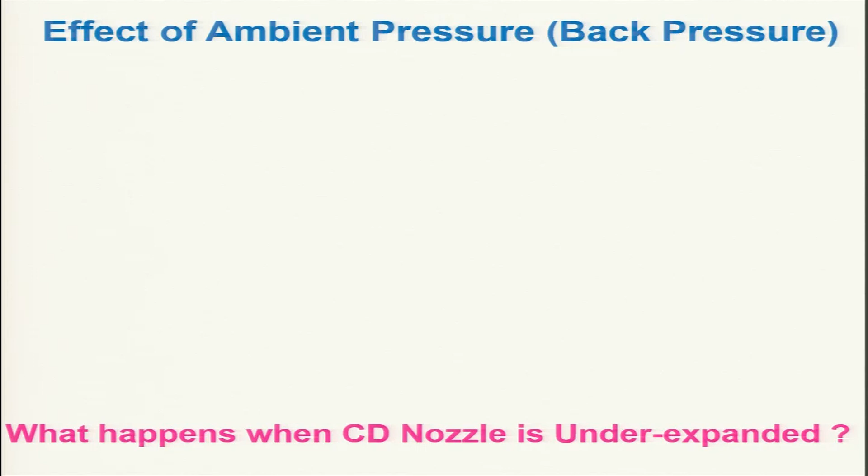And today we will be discussing the various features downstream of the nozzle when it is over expanded and when it is under expanded. So, let us consider the effect of ambient pressure or back pressure on this nozzle, and let us see what happens when the convergent-divergent nozzle is under expanded. So, let us look at what is happening.

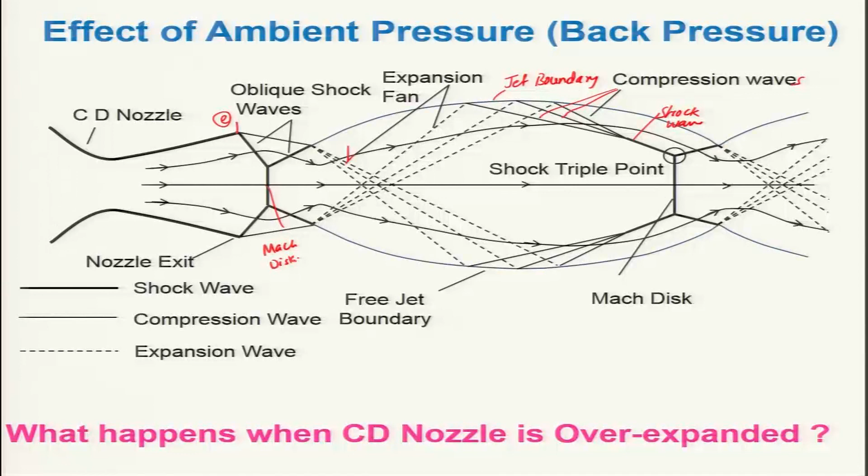expanded nozzle. So, one has to design in such a way that the over expanded portion of the operation during its flight must be reduced, rather one will go for little or more over expansion such that the losses will be minimized, and that is what is being done.

Now, let us look at what happens, because all this discussion we have done is considering that there is no boundary layer. However, there will be a boundary layer. It may be a very thin one, because the flow is accelerating, and this is your boundary layer. And when the shock is interacting with this boundary layer, the pressure will be higher downstream of the shock. So there will be an adverse pressure gradient, and the boundary layer is more likely to be separated out, such that there will be recirculation.

And of course, in this condition the pressure will be such that it may have a higher thrust. However, this boundary layer separation may be asymmetric in nature, so that it will give you side thrust. So, this flow separation will be dependent on several parameters. What are those things, let us look at it.

So, flow separation depends basically on the angle of divergence, and also the wall pressure, and it will be dependent on the local Mach number, and local pressure gradient, and wall roughness also plays an important role for initiation of boundary layer separation, particularly because wall roughness affects the turbulence level. If the turbulence level is higher, then naturally the flow is less likely to separate, and it will bear the higher adverse pressure gradient. So, for that, of course,

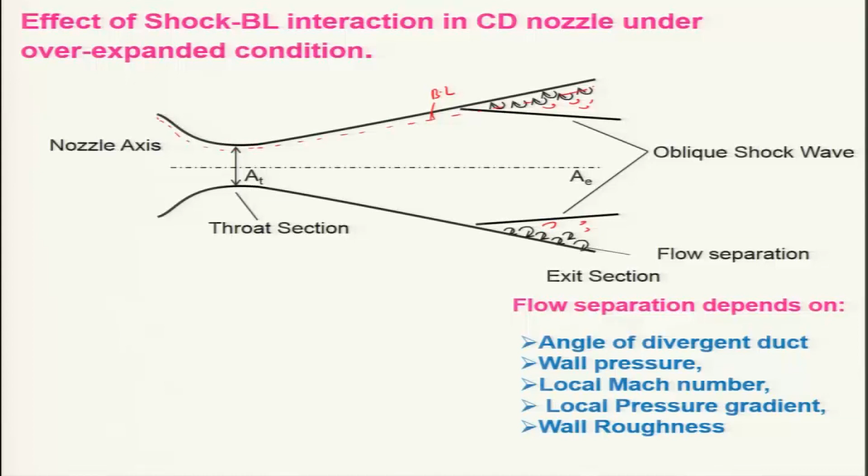while designing, a certain thumb rule is used, which is known as the Summerfield criterion for flow separation. That means PE by PA generally will be less than or equal to 0.4 to avoid flow separation, when PTE by PA, where PTE is basically PT2 at the reservoir, is greater than 16, for alpha, your nozzle angle, less than or equal to 30 degrees. If you look at this angle, this is alpha, less than or equal to 30 degrees.

But this is a thumb rule, and it is also dependent on the local Mach number of the flow. So, people have conducted experiments and arrived at a semi-empirical criterion for flow separation, that is PE by PA is equal to 1.88 ME minus 1 to the power minus 0.64. That means if the Mach number is greater than 1, naturally this will be positive, so the exit pressure will be less than PA,

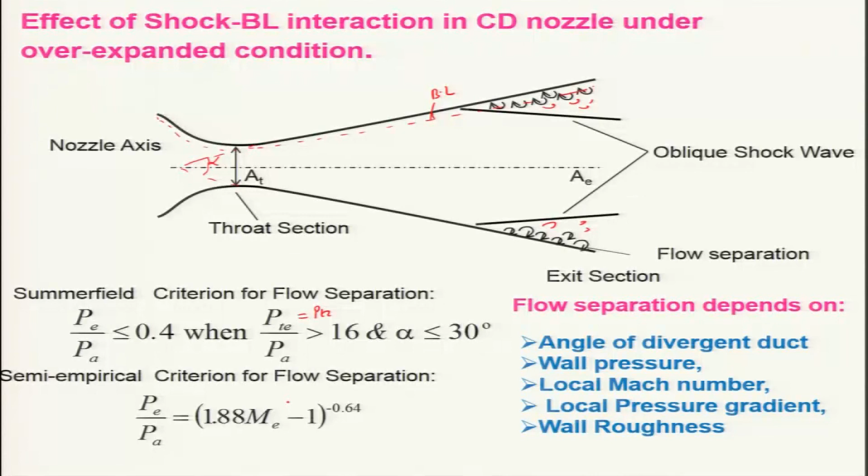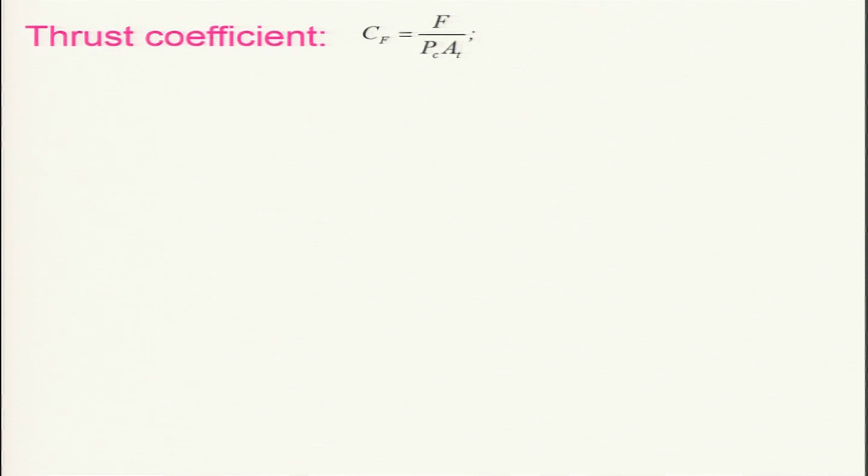So, let us now look at the thrust coefficient, which we had defined earlier. We know the thrust coefficient Cf is equal to the thrust divided by chamber pressure Pc and At, your throat area, corresponding to the choked condition. So, let us recall the thrust equation for a rocket engine that we derived earlier, that is the thrust F is equal to m dot P VE plus PE minus PA into the exit area of the nozzle.

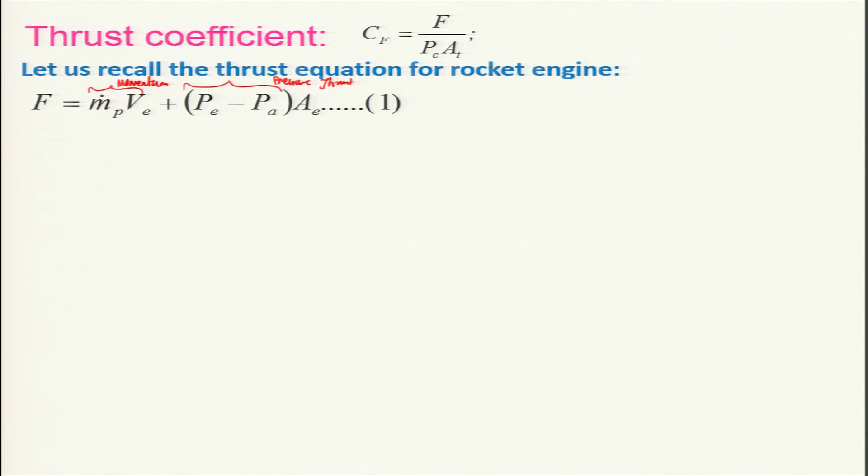So, this is basically momentum thrust, and this portion is your pressure thrust, which we have already discussed, and keep in mind that there is no inlet drag in this, or the ram effect is not there, because this is a non-air breathing engine. And in the rocket engine, except during starting and shutting down, the nozzle is choked most of the time.

The expression for the choked mass flow can be derived and written as m dot P is equal to PT2, your chamber pressure, times A star, your throat area at choked condition. Keep in mind that under this condition the throat will attain Mach number 1, sonic velocity, and this is aerodynamically choked, times root gamma divided by root R TT2, where TT2 is your chamber temperature, R is your specific gas constant, into 2 by gamma plus 1 to the power gamma plus 1 divided by 2 gamma minus 1.

This you can derive very easily, as we have already discussed isentropic flow through a variable area duct. And we have already derived the exit velocity expression in terms of the temperature, that is root of 2 gamma RU, your universal gas constant, times TT2, your chamber temperature, divided by gamma minus 1 times m bar, the molecular weight of the gas, into 1 minus P by PT2 to the power gamma minus 1 divided by gamma. We have already derived this expression.

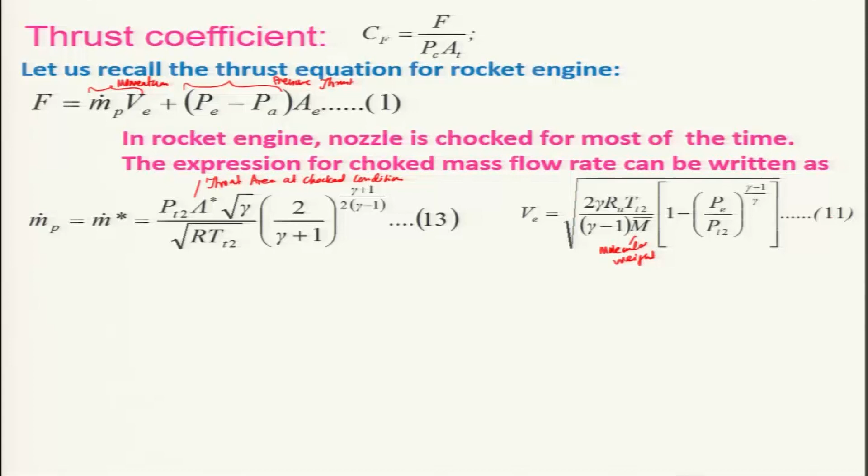What we will be doing, we will be basically using equation 11 and equation 13 in the expression of equation 1, and then we will get basically an expression for the thrust. You can see that it is a very big expression, and we can simplify a little bit and recognize that this is basically Ru, the universal gas constant, by the molecular weight, and this you can basically cancel out. This portion will be cancelled out, right, and you can take this term into this root over,

and I can write down that F is equal to PT2 A star, root over of gamma, 2 by gamma plus 1, gamma plus 1 by gamma minus 1, and this will be 2 gamma square by gamma minus 1, into 1 minus Pe by PT2 to the power gamma minus 1 by gamma, plus Pe minus Pa, and this is the expression you can get over here.

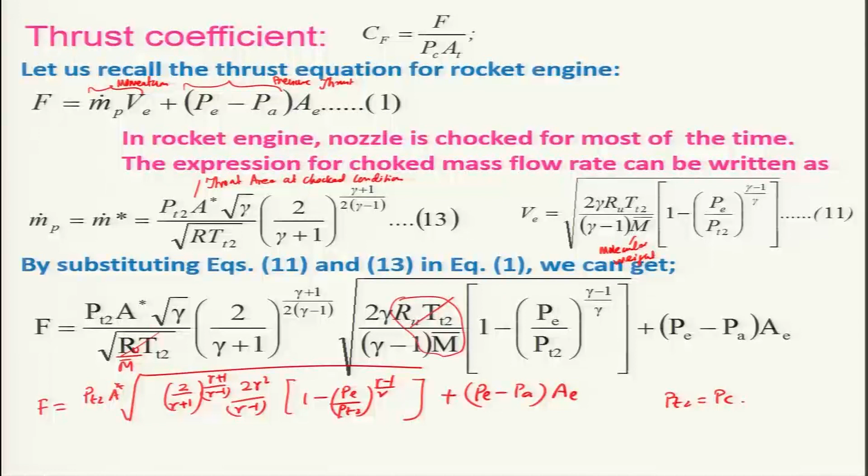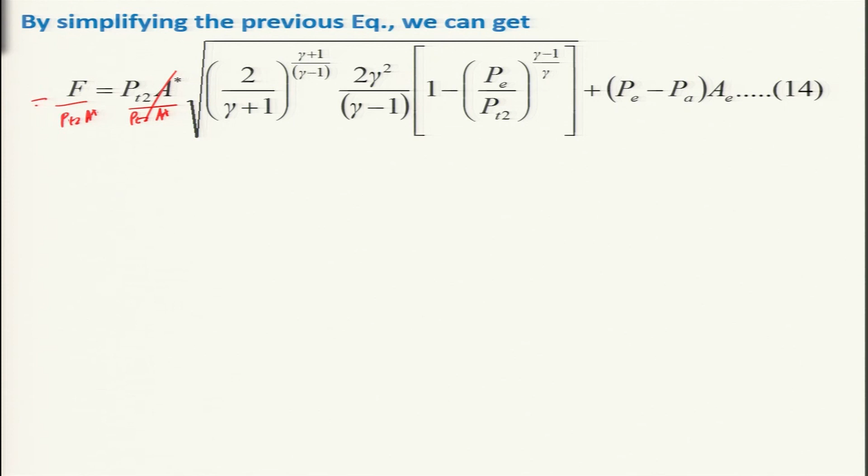And we are going to find out an expression for the thrust coefficient Cf. Therefore, Cf becomes basically F divided by PC A star, and keep in mind that PT2 is equal to PC, the chamber pressure. By doing that we can simplify this expression we have already written over here. So, if I divide this by PT2 A star, cancel it, this is nothing but your Cf. And when we are doing that, we will also have to do this here, that is PT2 A star.

So, that becomes Cf, which is F divided by PT2 A star, and this expression you already know, it is the same as that, and this became Pe by PT2 minus Pa by PT2 times Ae by A star, and this is also known as epsilon, the expansion ratio Ae by A star. Ae is the exit area of the CD nozzle, and A star is the throat area. And you can see from here that Cf is basically a function of gamma, the pressure ratio Pe by PT2, Pa by PT2, and also Ae by A star.

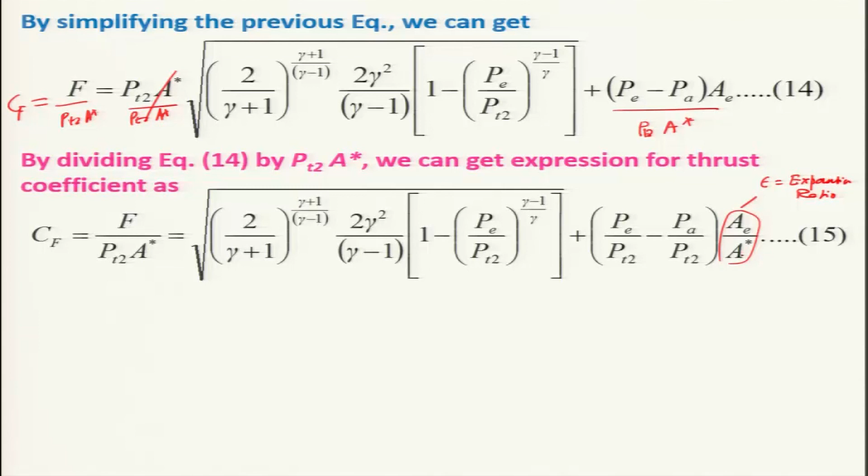This expression indicates basically the amplification of the thrust due to expansion in a CD nozzle as compared to the thrust if PT2 acts on the throat area alone. For example, if I consider this is a CD nozzle, and this is the chamber pressure PT2, and this is your throat area A star under choked conditions. This is the velocity which will be coming over here, such that PT2 is acting on this area A star, and that will be giving a thrust.

Due to this divergent duct, the thrust will be increasing, and that gives the amplification, how far it will go beyond the thrust if the pressure PT2 had acted over the throat area or the choked area. So, this is the indicator of amplification of thrust. As I told earlier, Cf is a function of Pe by PT2, the pressure ratio across the nozzle, and it also depends on the atmospheric pressure with respect to the chamber pressure, Ae by A star, the expansion ratio, and gamma.

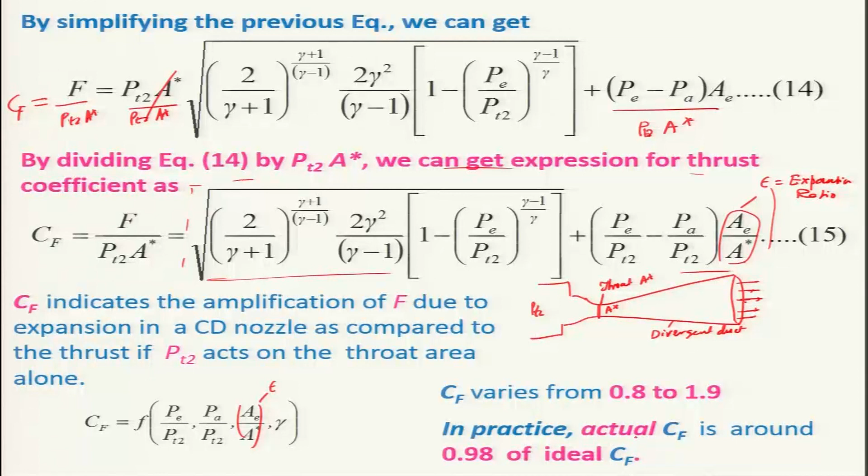Whereas the thrust is much easier to measure under static conditions, and we can easily measure the chamber pressure, and under choked condition the throat area is the same as the choked area. So, if I measure these, I can estimate the thrust coefficient experimentally. The actual one will be from the measurement, and the actual Cf is around 0.98 of the ideal Cf, which means basically 2% error if you just take the theoretical value. So, it is really not much, but you always have to rely on the experiment to see what is happening.

So, with this I will stop. In the next lecture we will be discussing this thrust coefficient further.